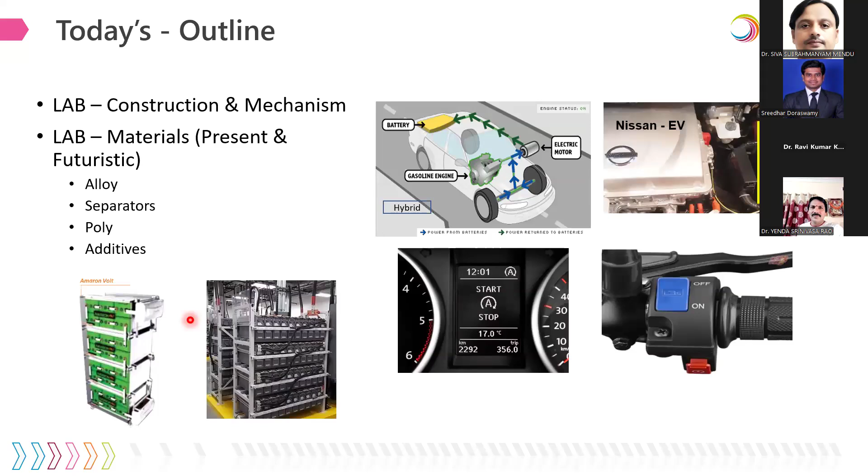So this is about the topics which we are going to look upon. Giving you the basics about the electrochemical series - these are different metals which like to gain electrons or lose electrons. Lead is there, which likes to gain more electrons and convert it to lead dioxide or lead sulfate.

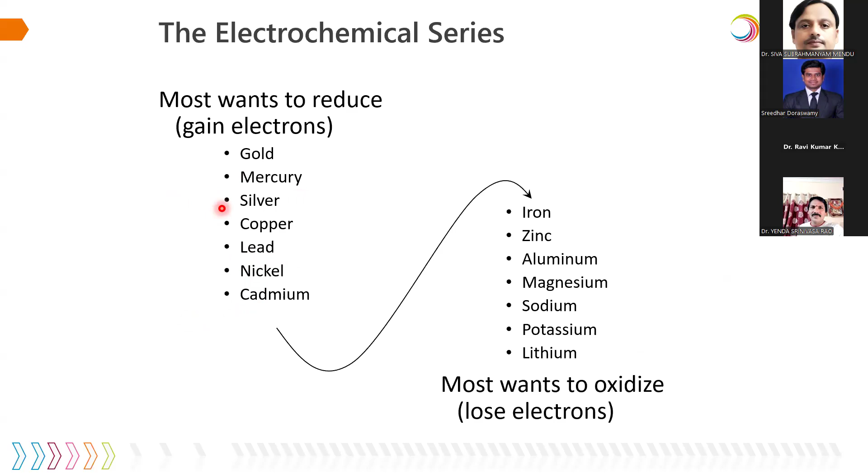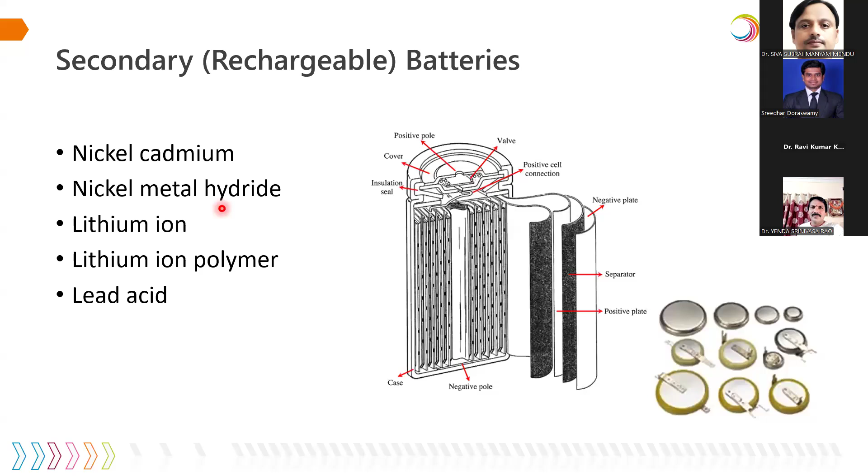Basically there are 2 types of batteries, primary and secondary. Primary batteries are just disposable batteries, and secondary batteries are rechargeable batteries. A few examples of primary batteries: zinc carbon, which we normally use like AA, AAA batteries in our homes - Leclanche is one scientist who came up with the zinc-based disposable batteries. And secondary batteries, here are a few examples: nickel cadmium, nickel metal hydride, lithium and lithium polymer, lead acid.

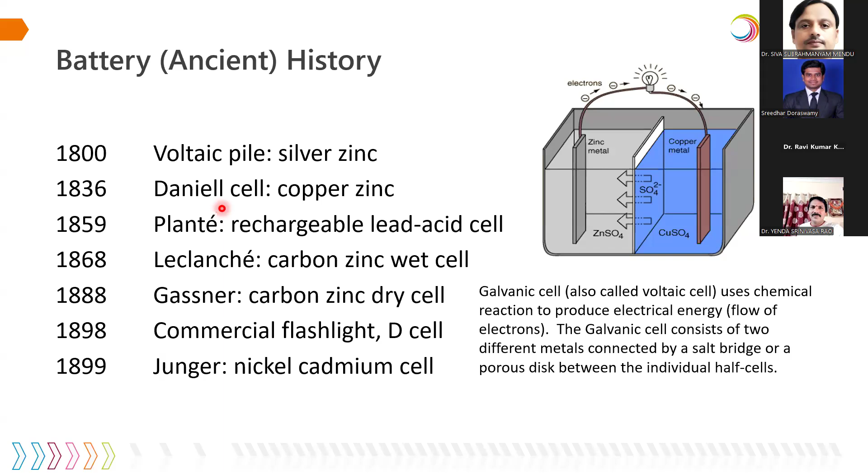If you see the history of the battery, in the 1800s it started with the voltaic pile having silver and zinc as current collectors of the metal rods, where the electrolyte solution is zinc sulfate and copper sulfate. Then Daniel cell, copper zinc, Plante - that's the first lead acid battery, demonstrated publicly to gain public interest in 1859. Leclanche in 1868, 1888 Gassner, and commercial Junger batteries in 98 and 99 of the 1800s.

And the latest is lithium ion. Everyone, even we, are also keenly working on developing these batteries into commercialization.

Coming to the construction of lead acid batteries, basically we have a grid. This is made up of a metal, looks like a mesh, and also a positive grid, this is also made out of a metal, it's also like a mesh. Then an active material is pasted in these voids of the grids.

Then a separator is wrapped, either positive wrapping or negative wrapping can be done, and then stacked into a bunch of positive and negative electrodes, connected to the negative terminals, and then it is sealed in a plastic container. This is our basic construction of a lead acid battery. And of course, the acid used is sulfuric acid, which is filled.

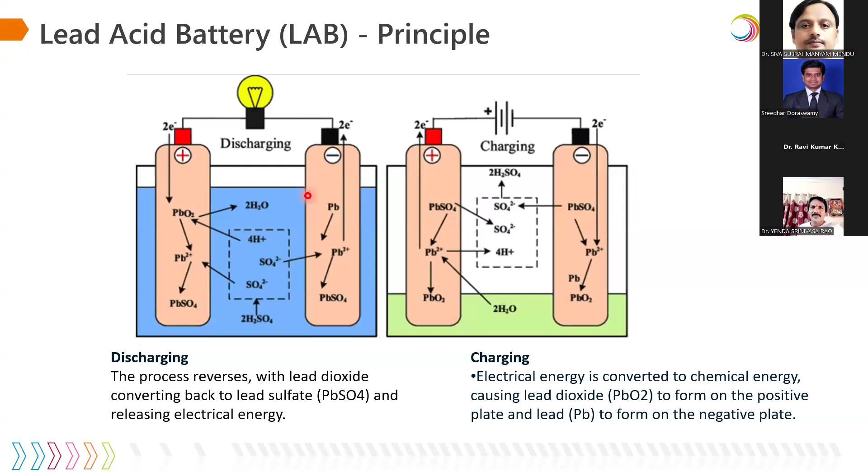So this is the basic mechanism of a lead acid battery. While it discharges at the positive, at the anode, both the anode and cathode are applied with the same type of material, called lead oxide or lead suboxide. When made into paste, it turns into lead oxide and 3BS, tribasic lead sulfate crystals. At the positive, the lead oxide remains the same, and partially when it interacts with the sulfuric acid, it converts into tribasic lead sulfate. So this is the generic process that happens at the curing level.

At the formation, as we say it's an electrochemical storage, we charge this, that's nothing but formation, so we get into 100% state of charge of the battery. At the anode, the lead suboxide and the 3BS converts into metallic lead and leaves out hydrogen sulfate. Similarly at the cathode, the suboxide converts into lead dioxide. If we see, the densities are varied here: the metallic lead density is 11.34 grams per centimeter cube, lead suboxide or lead oxide is 9.53, lead dioxide is 9.38, and lead sulfate is 6.29. Here we can see the densities vary at different levels, from pasting to formation and again charge and discharge conditions. This means phase transformations happen at each and every cycle in the electrodes.

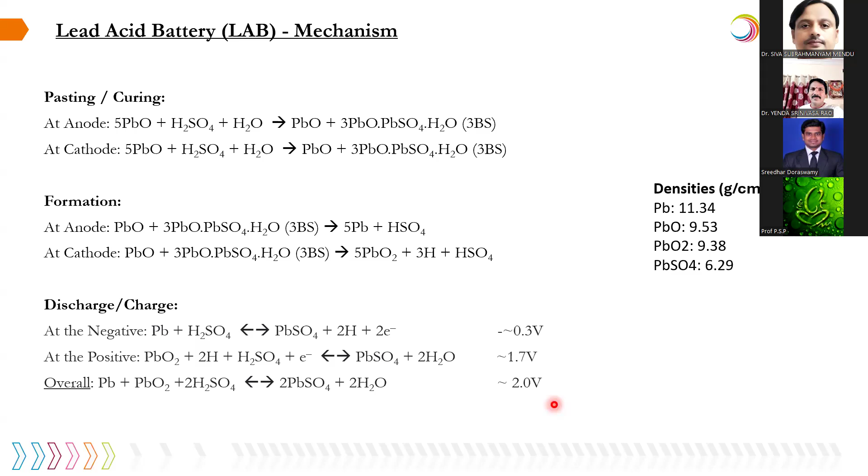And then later, the idle start-stop condition. This idle start-stop condition is a type of application where your vehicle will be halted at traffic signals, and then the battery gives the energy again to start the engine of the vehicle. But in the meantime, all your electrical equipment like AC, music system, power steering, power windows, lights, etc., should be working in that idle condition. So at that time, the battery will be delivering the energy. That is called idle start-stop condition, where you save fuel at traffic signals.

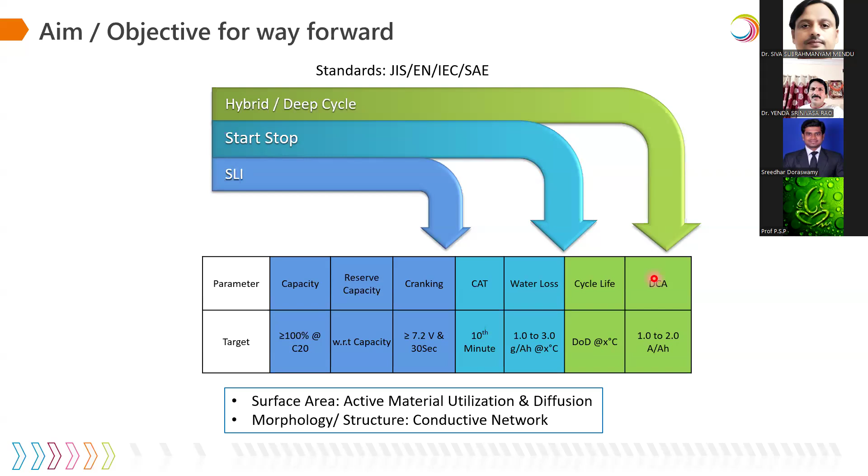Coming to hybrid and deep cycle - deep cycle also talks about EV requirements. Deep cycle means it may be either 80% discharge or even 100% discharge, that's a deep cycle. And the dynamic charge acceptance, as I was saying earlier, regenerative braking, where the battery needs to be charged even more aggressively. So as these evolutions are happening, the requirements are demanding the batteries to perform under very stressful conditions. So the surface area and the morphological structure of the electrodes are very critical elements.

Now there is a new requirement coming. It's called auxiliary batteries, especially designed for plug-in hybrid and electric vehicles. So what is an auxiliary battery? As I gave you an example in an earlier slide, the Nissan EV, where a secondary battery is placed for powering the primary battery and also establishing the safety features of the vehicle. Safety features means emergency door openings, alarms, alerts, SOS, and even nowadays the vehicles are connected to cloud, the communication system, all these things.

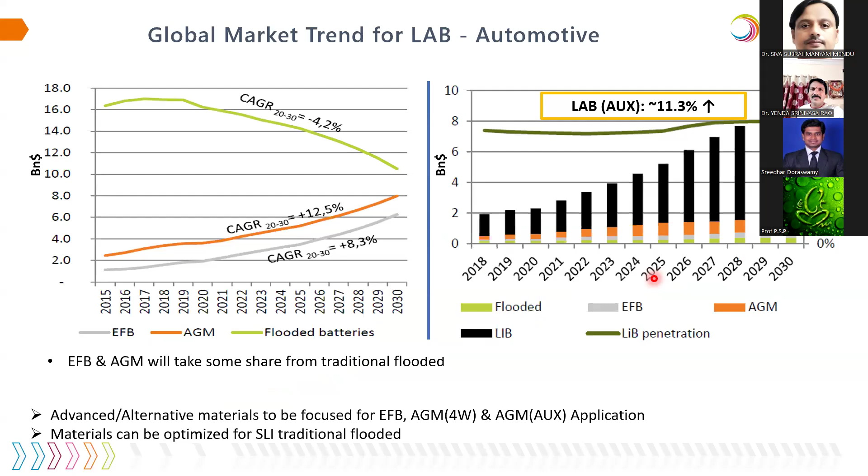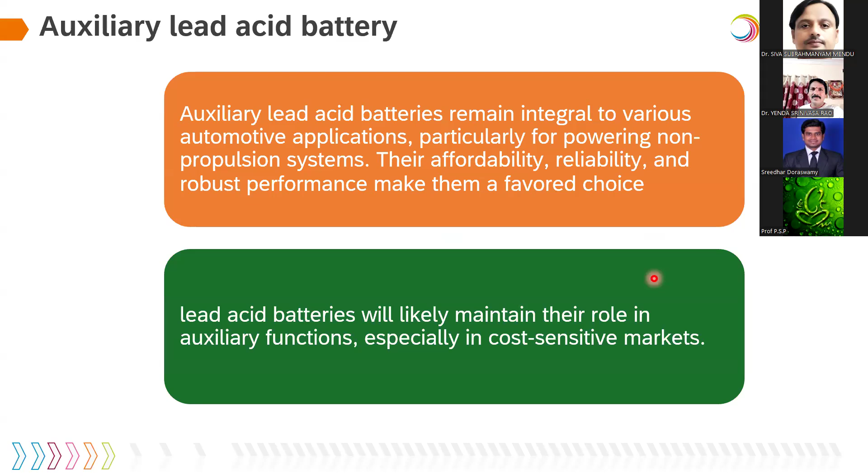So I'm saying why lead acid battery as an auxiliary source, because it's affordable, reliable, and has robust performance, and its role will be much better, most promising in cost sensitive markets.

This is a survey which was taken place just 6 months before with around 28 automotive companies across the globe, on the requirement for a 12-volt battery, either for battery electric vehicle, that is BEV, or plug-in hybrid vehicles. So those 28 companies gave their view upon the 12-volt battery requirement. 14 companies laid out that essentials need to be there: the 12-volt system should perform like key off, quiescent loads, wake up, after run, key off loads, parking lights, and voltage stabilization for the high voltage system. Those are the requirements posed by those 14 companies.

And 12 companies just made sure that the battery can support the required energy or not. That's all.

So with this survey, the International Electrotechnical Commission, which defines standard protocols for energy storage applications, for 12-volt, of course this standard 60095-8 is in draft condition. Probably by March 2025, this may get frozen and finalized.

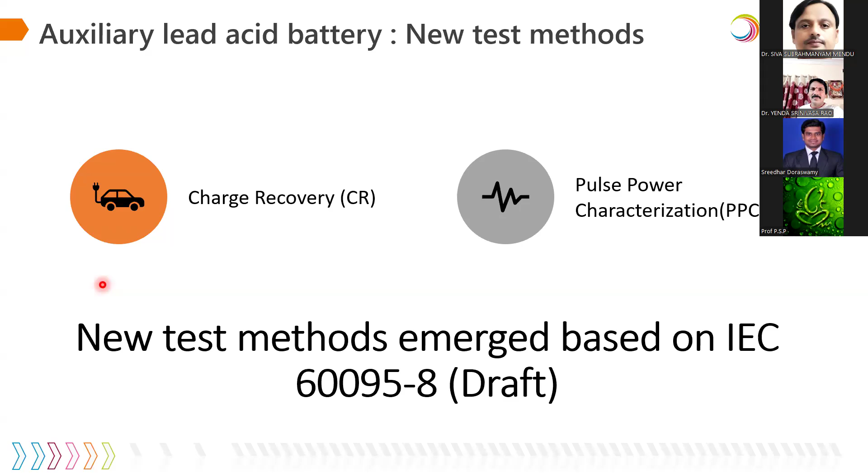So we will see what is this charge recovery, the 9th step, and the 10th one, pulse power characterization. These are two new test methods forced by the IEC for 12-volt battery requirements. As of now, there was no standard till date in the whole world, so now IEC is coming with the standard. If any energy storage technology meets these requirements, then that can have the market.

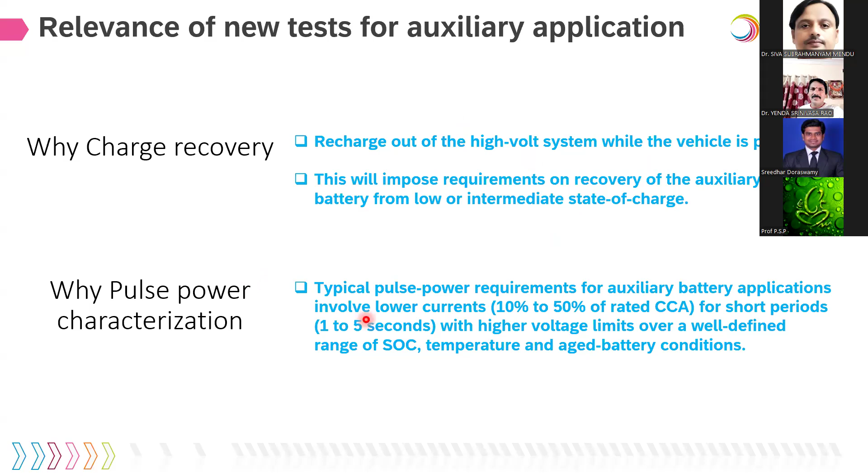So why charge recovery? As I said, the quick recharge needs to be there for the battery, even at parking condition - this is the requirement. And pulse power characterization is similar to the earlier cold cranking applications, but here with small current, but frequent time intervals. So these are the two things.

We dig deep about the charge recovery requirement. We see with 120 minutes, that means within 2 hours, the battery should reach more than 65% of SOC, that means 65% charging should happen. This is quite challenging even for lithium-ion related storage systems, where minus 18 degrees centigrade is the temperature where these batteries need to be responsive. If at that temperature it is not responsive, then mostly the battery will not be selected as an ideal solution for electric or plug-in hybrid.

So coming to the pulse power characterization, here it is based upon the state of charge of the batteries - 100%, 50%, 80%. The 80% has not yet been determined. By March 2025, this may be frozen at 100% SOC at small current rate, like 0.2 amps.

It should be greater than 11.9 volts - the 12-volt system should be more than 11.9. And at 0.4 condition, it should be more than 11.3 volts. Similarly, at 50% SOC condition, it should be greater than 10.3 volts for 0.2, and for 0.4 current condition, it should be greater than 9.3. So these challenges are not that difficult - these are achievable.

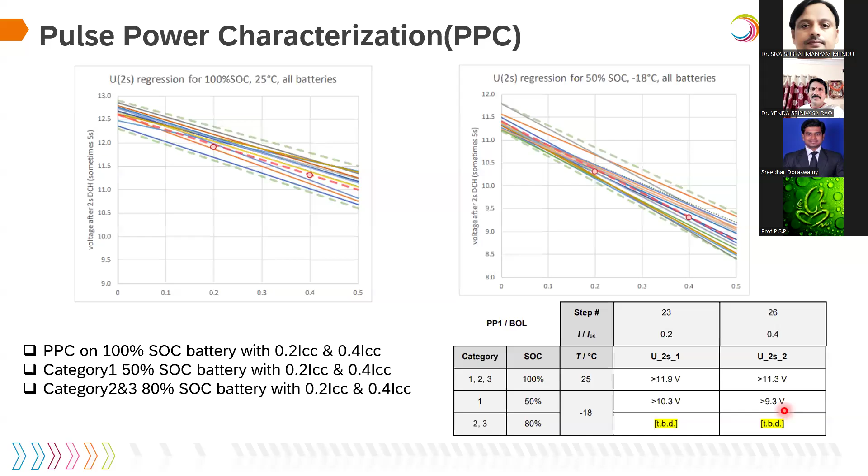So the charge recovery and pulse power characterization normally depend upon two parameters, called conductivity and DCA, dynamic charge acceptance, and cold cranking ability, CCA. The conductivity mostly depends - while seeing the test profile or requirements where the batteries are subjected - we have identified 4 segments in the positive: the grid thickness, that means current collector thickness, the type of alloy for the grid, and the active material density, and the conductive nature or conductive network inside that active material.

Whereas in pulse power characterization, the negative active material density, the expander optimization - the expander is a composition of 3 materials: one is barium sulfate, second is lignin, and third one is carbon. So we will see more advancements in those areas and surface area of those electrodes to meet these requirements, like charge recovery and PPC.

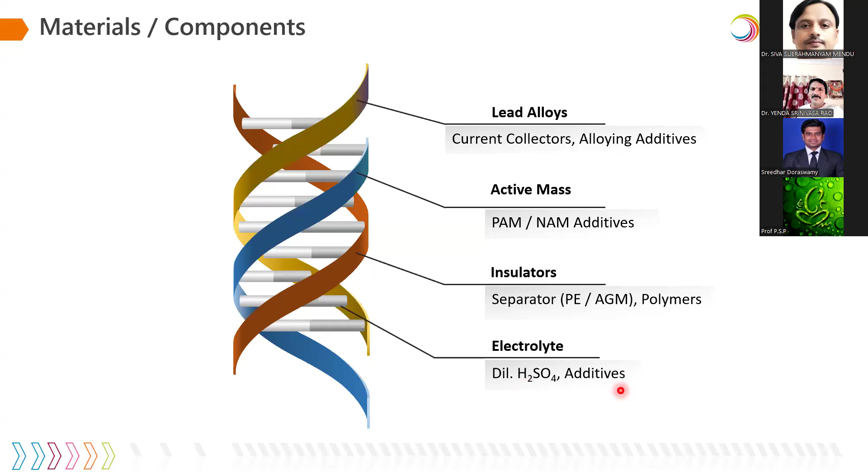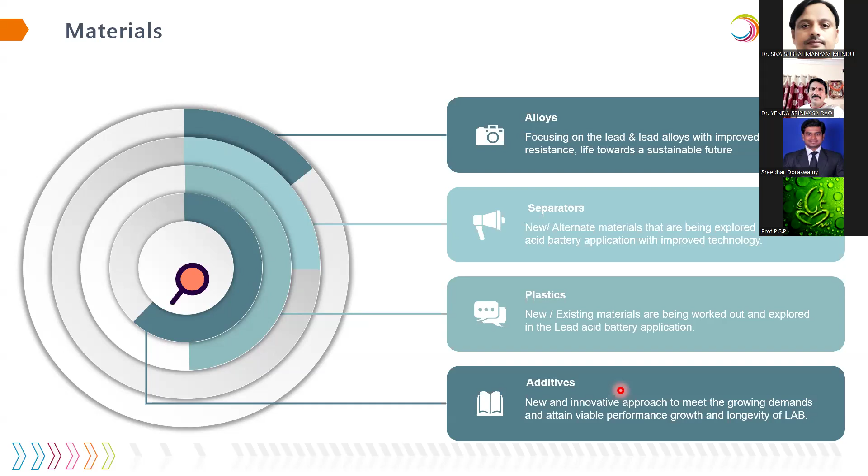So alloys mostly focus on corrosion resistance, like addressing premature losses. Separators with better porosity, better tortuosity are being explored. And plastics, yeah, flame retardant plastics are also being explored. And additives in all these above three areas, including the electrolyte, to improve the longevity.

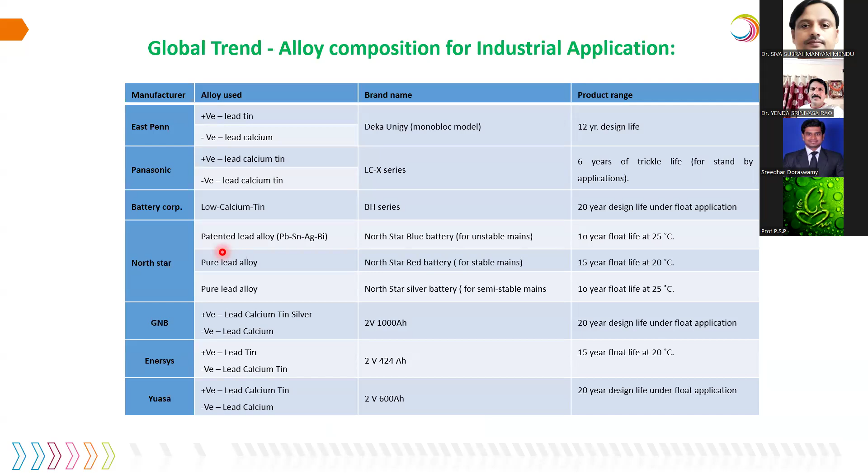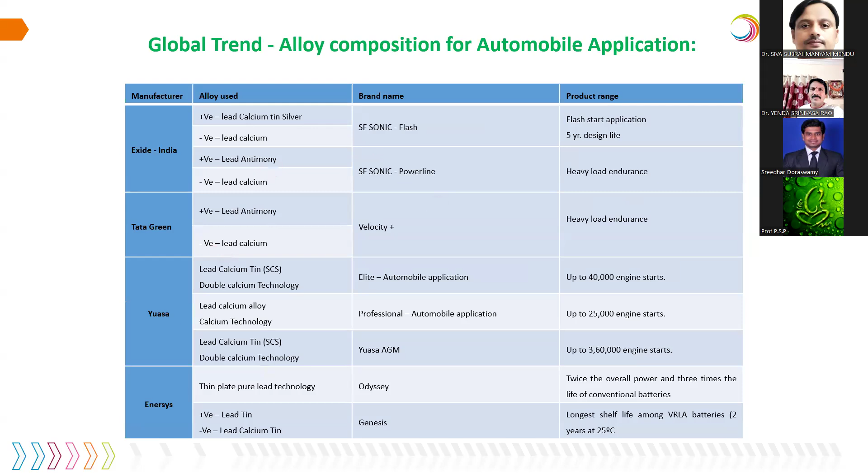These are the other technologies. So lead, as the primary material, like 99% lead has been used, and the other 1% is tin, calcium, antimony, silver, etc.

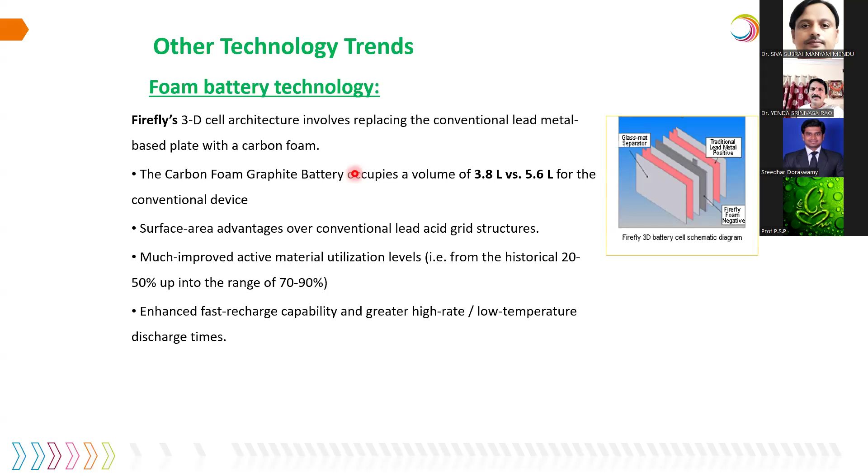So now, apart from lead, Firefly is one company which is working on pure graphite or carbon foam, as they term it. They have replaced the lead current collector with this foam, and they have immensely improved the active material utilization rates, and even achieved better recharging capabilities.

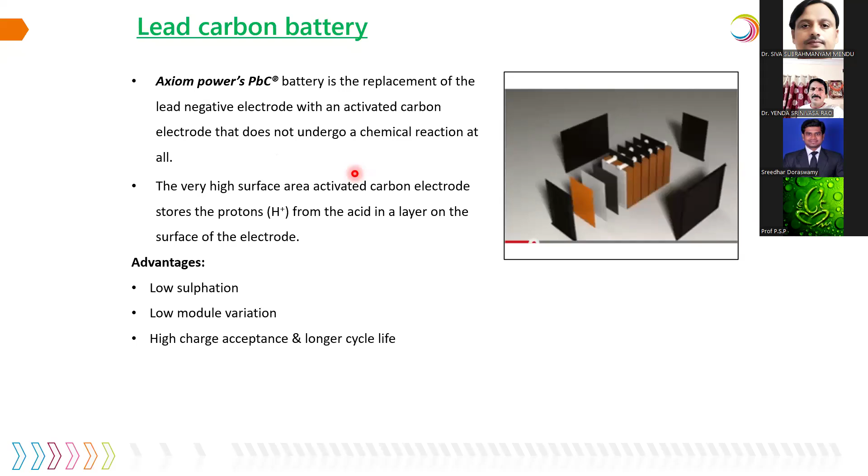Axiom Power is also a US based company; they have also replaced the lead grids with carbon. There is another company which is working on copper mesh coated with carbon and using it in their batteries.

So this is just a prototype; these type of batteries are not yet commercialized.

So the key takeaway from the alloy perspective is that most of the leading manufacturers are using lead calcium tin and lead antimony in different applications. But what are the characterization techniques involved here?

So the characterization techniques here, as I was saying about the corrosion, we do corrosion testing. There are three types of corrosion testing: one is the gravimetric method, the second is Tafel extrapolation, and the third is accelerated potential techniques.

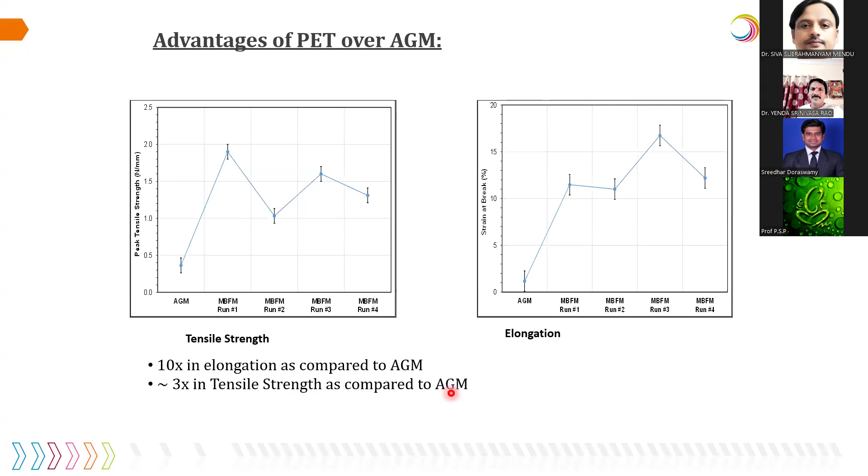When we compare the properties, normal AGM is 10 times lower in the elongation, and 3 times lower in the tensile. So the composite AGM separators are taking the pace in this technology.

Coming to the polyethylene separators, the essential properties for a polyethylene separator should be low acid solubility, good oxidation resistance, low electrical resistance, low acid displacement, mechanical strength, wettability, and impurities. Impurities should be low. Normally in lead acid application, we talk the impurity should be at the ppm level.

Worldwide usage, we see 85% people are using the PE separator, and 15% other kinds of separators. There are also some disadvantages with the polyethylene separator: the high cost, low compressible forces, and the high internal resistance. Whereas in AGM, internal resistance is a little bit low, and that's why we may experience a few short circuits, but here, due to high internal resistance...

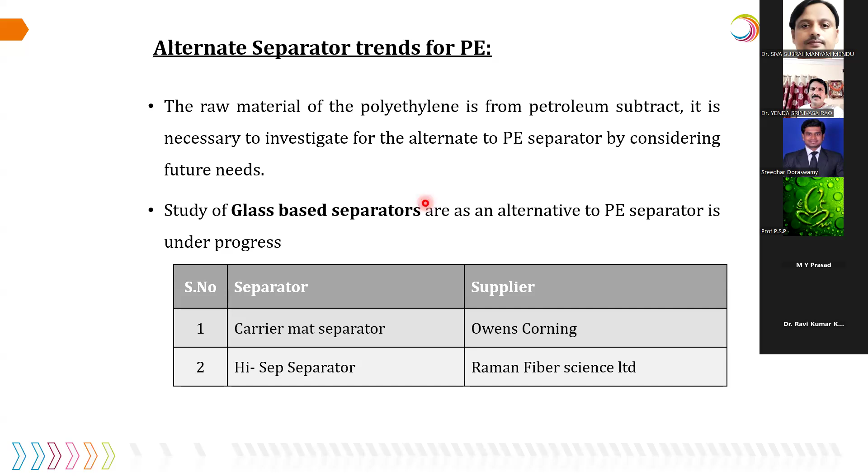Players in global space, the Owens Corning and Raman Fiber Science Limited, are exploring the alternate separators.

The key takeaways from the separator point of view: reducing the water loss or the stratification behavior, a horizontal rib profile in the polyethylene separator has been explored, and is in the developing stage. Right now it is a vertical profile. And in AGM, the polyester or polyethylene terephthalate based composite AGM separators are coming into place.

Coming to the characterization techniques, these also involve the mechanical properties like tensile, puncture, and surface area characterizations to see the pore size distributions in the separators. So all the properties we do, and also the electrochemical property, which is the ionic conductivity or the ionic resistance of the separators we see.

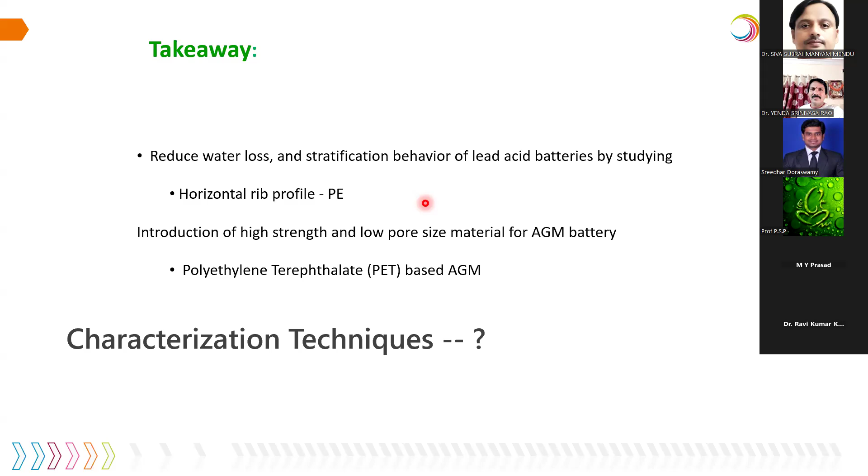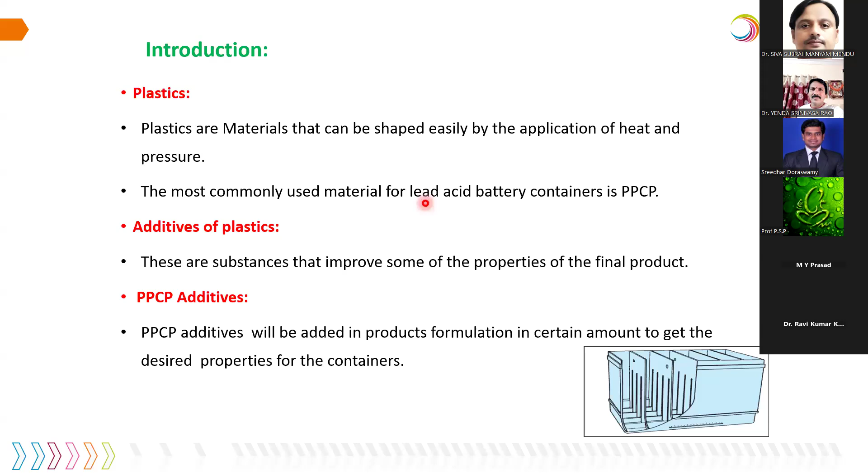Coming to the plastic segment, everyone is aware about the plastics. The plastic we use is PPCP, the polypropylene copolymer. Worldwide, that's the plastic everyone is using.

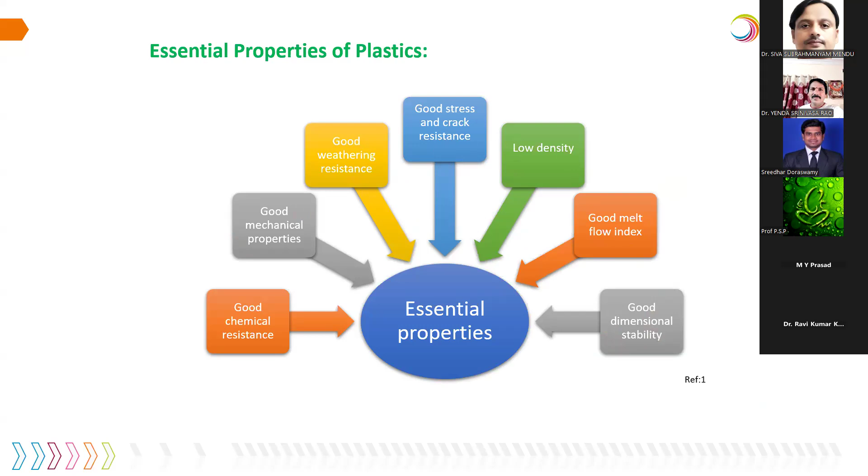The key parameters or key properties required for the plastics are good chemical resistance, good mechanical properties, weather resistance, crack resistance, low density, good melt flow index, and good dimensional stability. These are the requirements for the plastics.

People are also trying to have additives, similarly like in grid alloys or in the separators. In plastics also, some additives are doped to have better flame retardant behavior or improve the mechanical properties of the plastics.

Based on the function of the additive, property modifiers, stabilizers, processing aids, and property extenders are the selections we normally do. Based on the properties of the additives, flame retardants, impact modifiers, UV stabilizers, and chemical resistance materials are being explored.

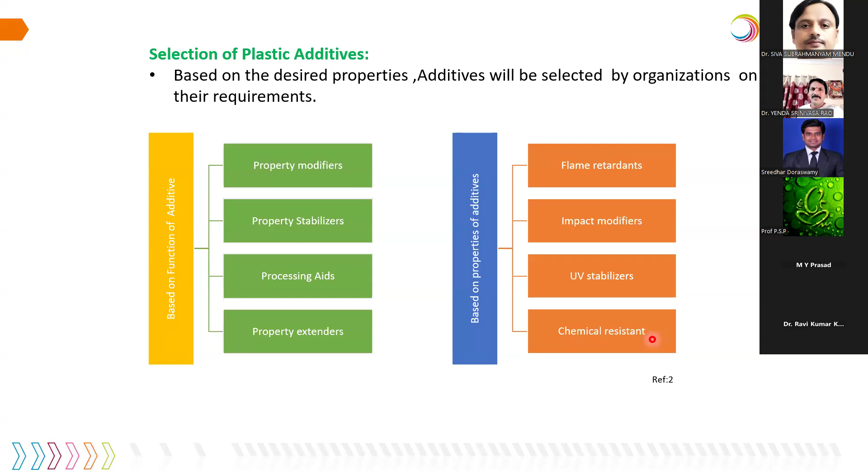When we categorize the plastics, there are 6 types of plastics: polypropylene and styrene based, and polyvinyl PVC or polycarbonate. These other materials are not that suitable for the chemical or acid resistance. That's the reason we use polypropylene or PPC and ABS in our battery manufacturing process.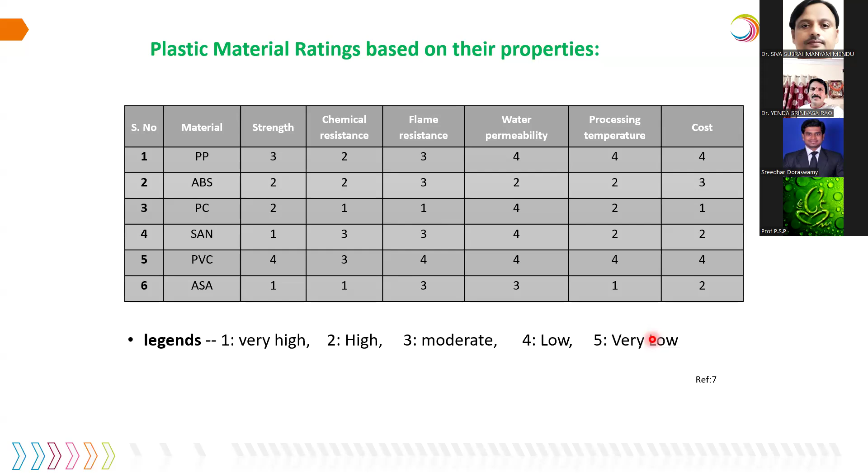A few additives are being explored. Here I have listed some of them. The calcium based additives, especially, people are highly recommending due to the plasticity and the manufacturing benefits.

Worldwide we see PP with additives are being explored, and then ABS with additives being sought by lead acid battery manufacturers across the globe.

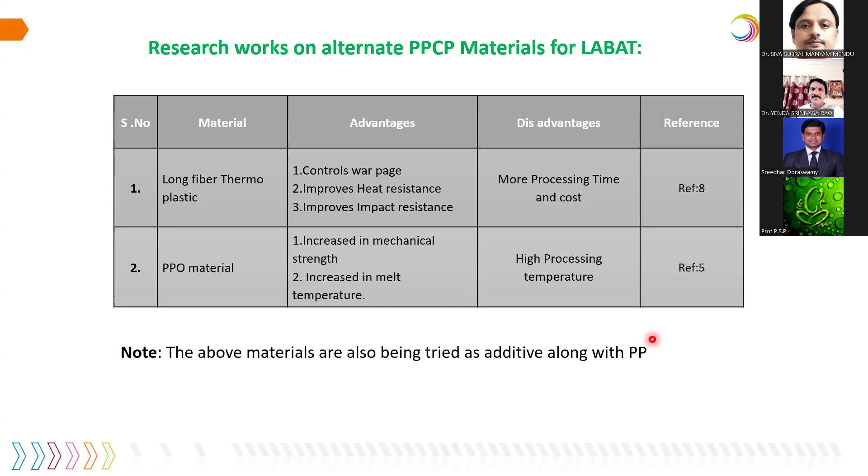The long fiber thermoplastics and the PPO material, the phosphorus based one, these are the two materials actively sought out for polypropylene due to its compatibility with polypropylene and also the cost of the material.

Coming to the characterization techniques involved here, we do mechanical properties like flexural, Izod tests on this material, flammability with respect to UL 94 standard we follow, and DSC, TGA thermal related stability analysis we do for different types of formulations and different types of plastics.

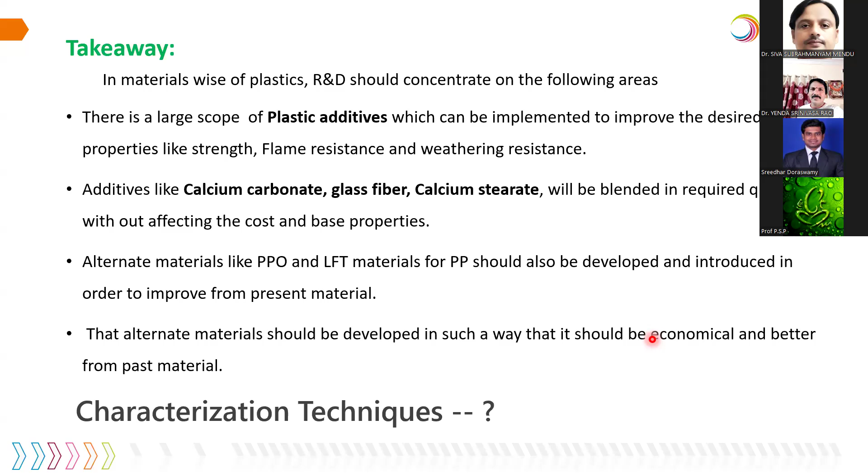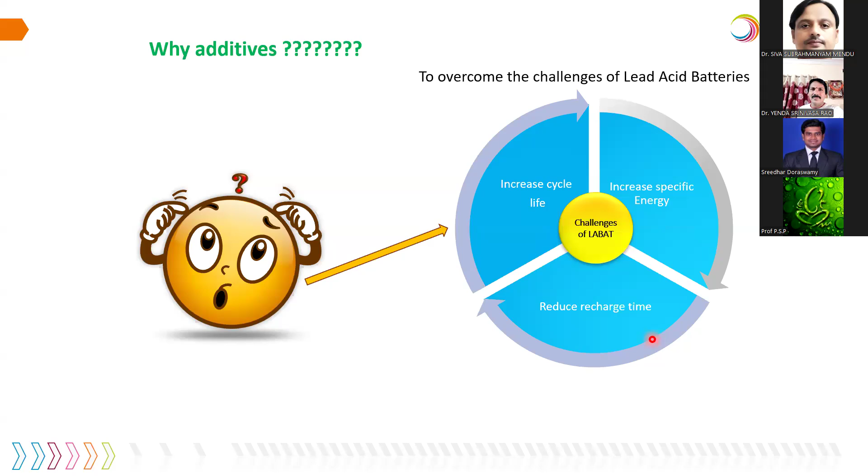Now coming to additives' role, these additives are primarily focused upon the active material additives. As we know, the active material here is lead oxide, and to improve the utilization rate of those active materials, that means increasing the span of the activeness of that material, we require some additives.

Normally these additives are 2% by weight, used either in positive or negative at maximum, and the impurity should be less than 0.1%.

If you see here, I have given the electrode preparation process, that is the preparation of the PAM, the positive active material, where lead oxide is added with the binder. This is reacted with sulfuric acid, and the additive used here is SPTH, that is sodium perborate tetrahydrate, and for some applications 4BS, that is tetrabasic sulfate crystals, is used as an additive in the PAM, the positive active material.

Whereas in the NAM, lead oxide, binder, and sulfuric acid are there, but the expander is one critical ingredient used. This expander consists of three elements: barium sulfate, lignin, and carbon. These materials are added into the pasting mixer along with the lead oxide powder, where the lead grids or panels are included, are indented, and the pasting happens, and then it goes into the flash dryer and the curing chamber, where the conversion happens from lead oxide to tribasic or tetrabasic structures, and then positive flat plates and negative flat plates are made.

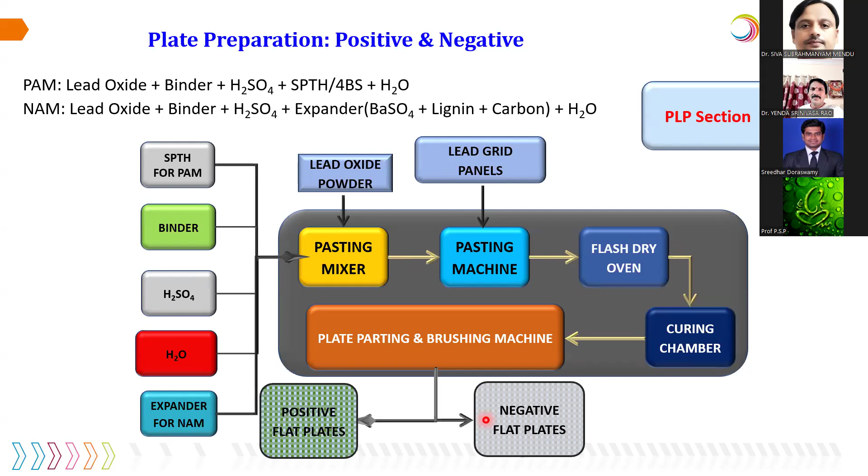We'll just see the oxide preparation process here.

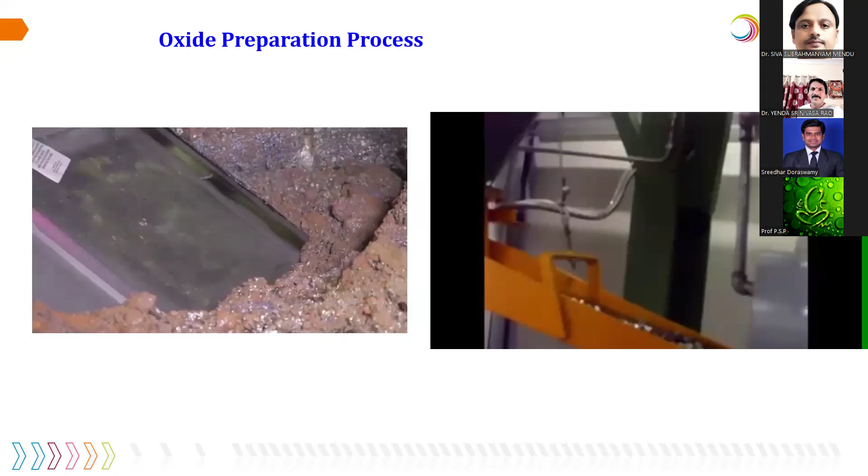This is the Barton pot oxide preparation technique, where the lead ingot has been melted. This is the dross or the slag. The melted metal reacts with the oxygen and then forms a powder.

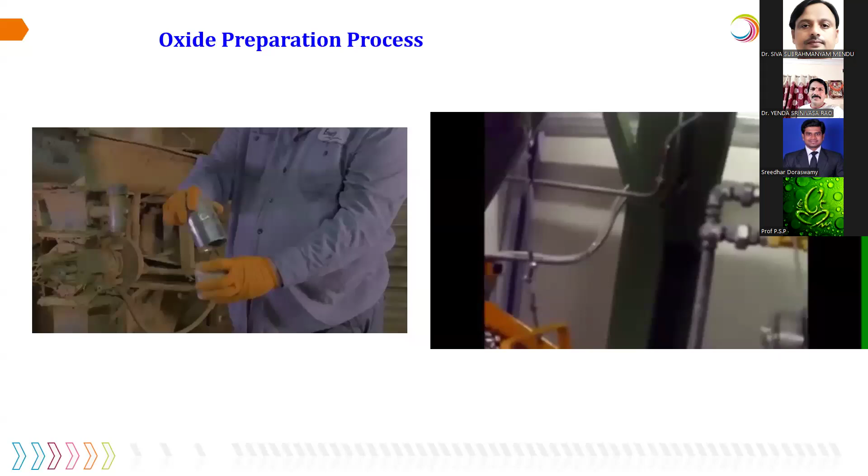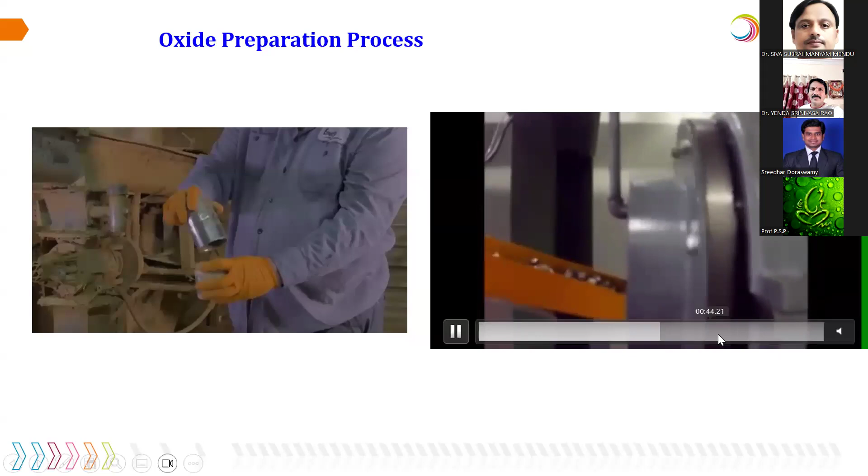So this is the right side one, the ball mill process. The left one was the Barton pot. This is the ball mill, where the lead ingots are made into small balls and then rotated at the desirable speed, where this lead metal converts into lead oxide powder. So this is the horizontal or conventional ball mill equipment. This is how the active material or the lead oxide powder is made.

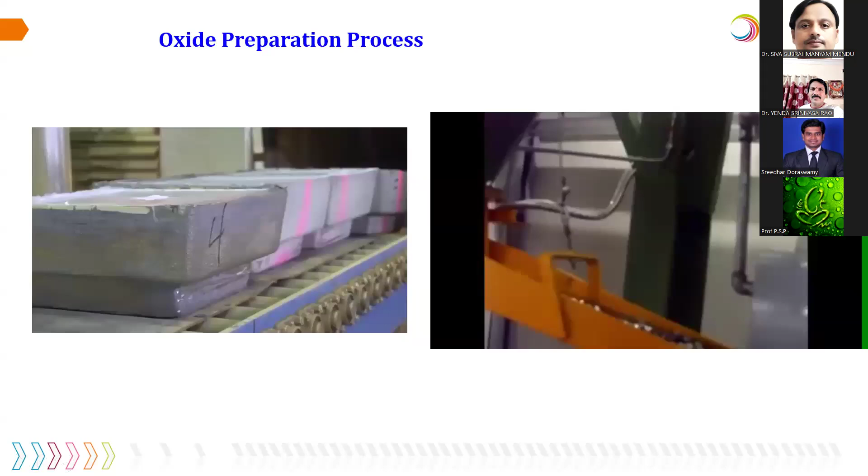Now we see the comparison between the two techniques, how the lead oxide powder is made by the ball mill method and the Barton method. I hope my cursor is visible, or should I use the pointer?

You can see here, so we have both processes, and mostly in the whole world these two processes are used with respect to the application. For stationary applications, the Barton pot method is used, and for automotive and quick charging, quick discharge applications, we use the ball mill technique.

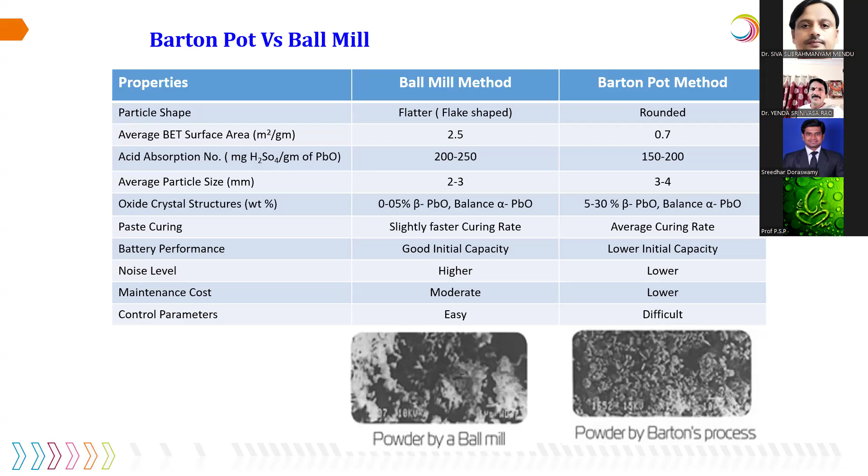So here is the paste mixing process of the active material preparation, where the lead oxide powder is mixed with either 3BS or the 4BS crystals, that is the tetrabasic sulfate crystals, in the PAM. In the NAM, the carbon and lignin are mixed up here.

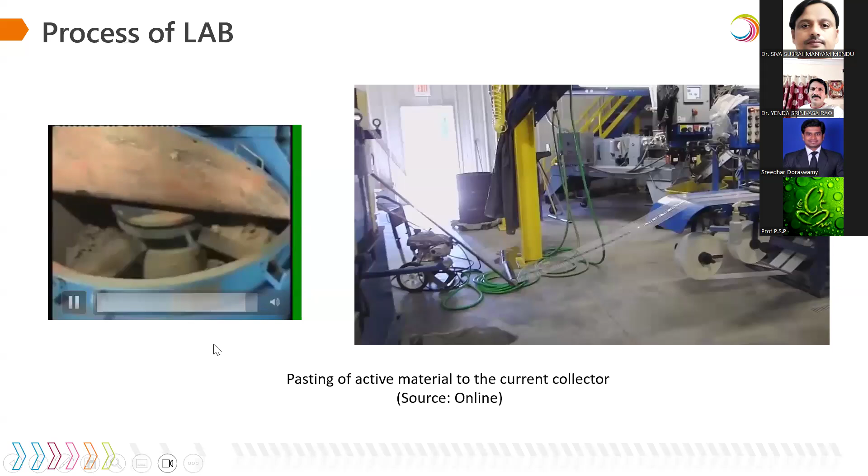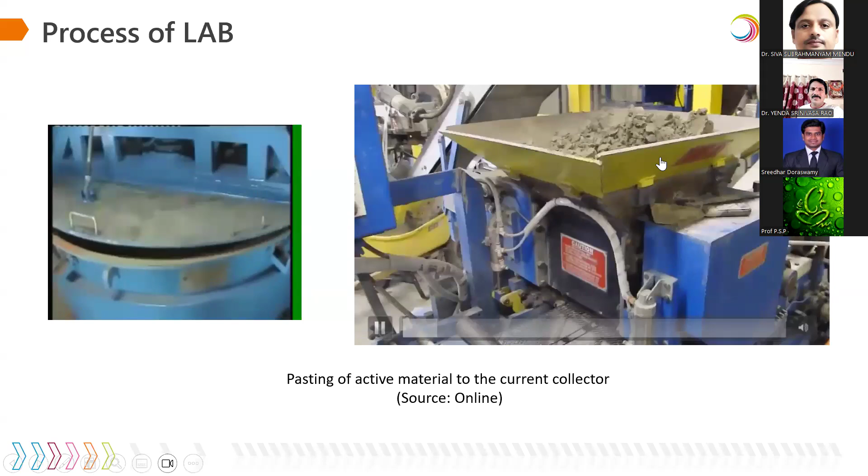And here is the pasting process, where the mesh type grids are applied with the paste, which is the active material. Then it goes into the flash dryer, at a temperature around 180 degrees centigrade to remove the moisture and other contents in the plate. These are the flash dryers.

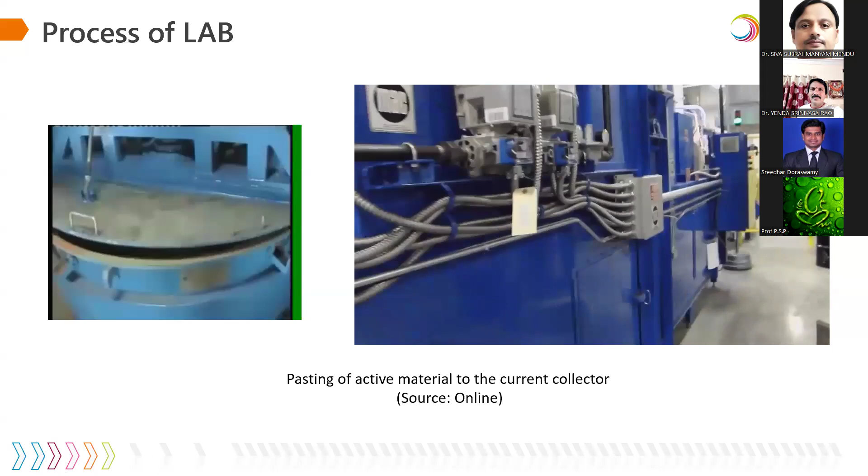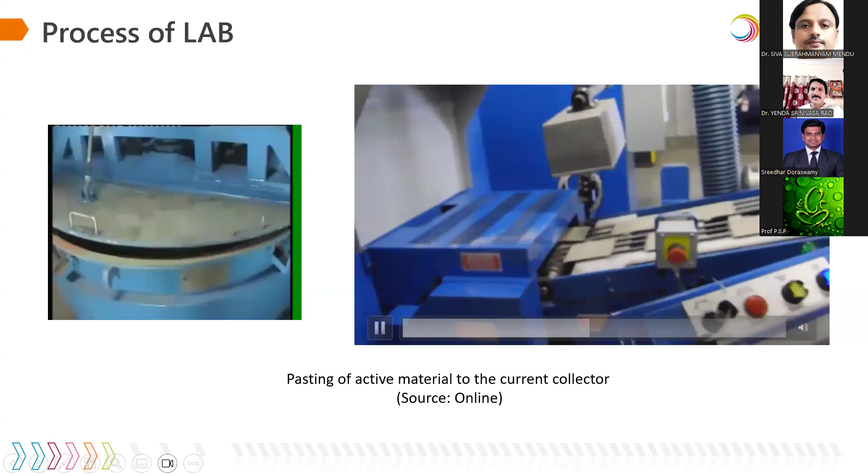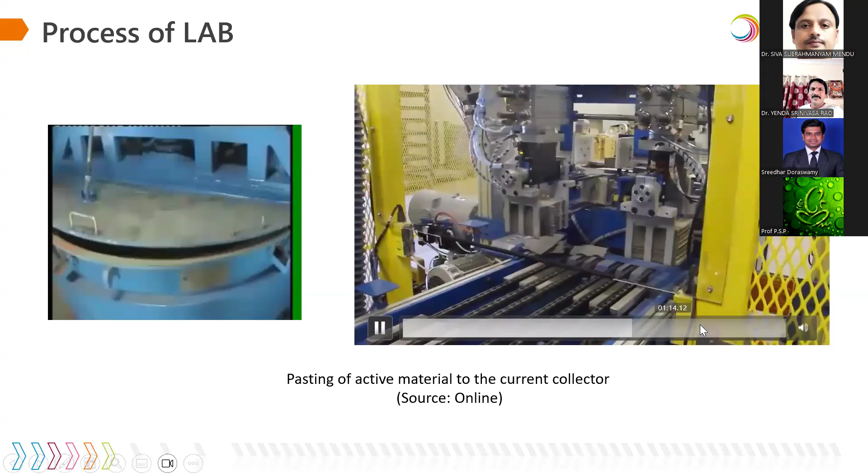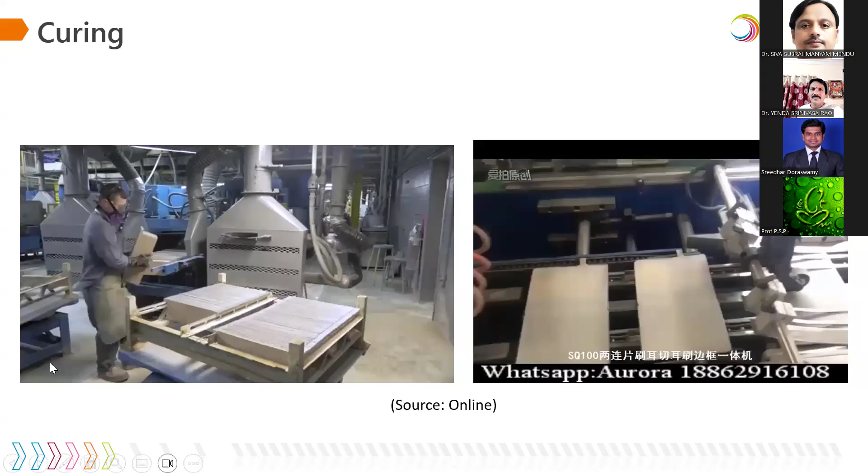And the plates are being collected by the robotic arm. Just forward it, these are the electrodes. After the pasting, it goes for curing. This is the big electrode. These electrodes are used for telecom applications, railways, and industrial applications.

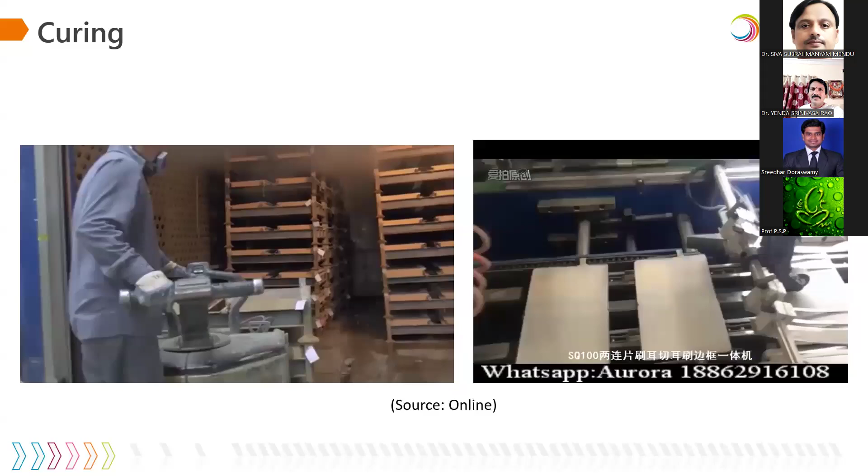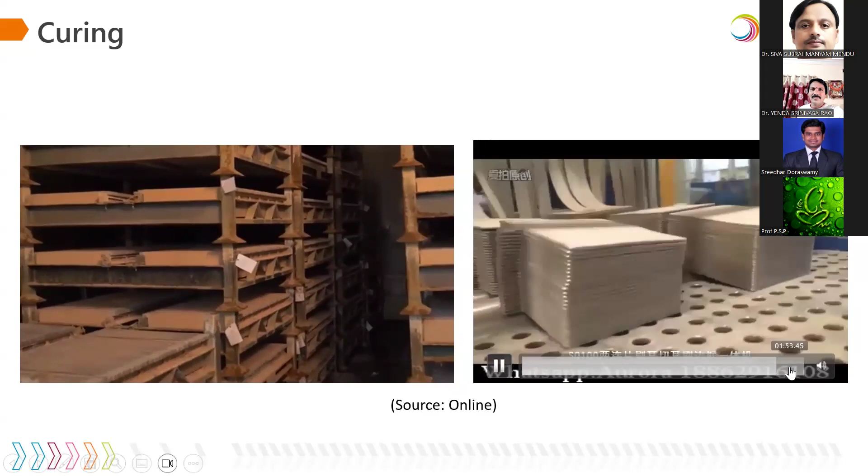So there are different types of additives: positive additives, negative additives, and electrolyte additives. I'll directly jump into what additives we use, even globally what people are using. This is called the seed crystal, nothing but 4BS crystal. People sometimes term it tetrabasic sulfate crystals, used for cranking applications.

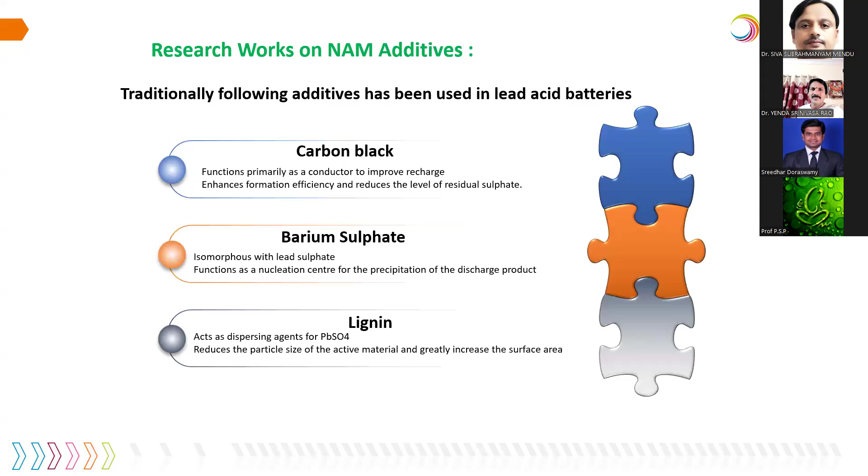Titanium oxide, tin oxide, other metal oxides, and red lead have been used. Sodium salts, CMC, silica, and graphite have been used in the PAM additives for improving the porosity. In the NAM additives, we use carbon black, barium sulfate, and lignin materials.

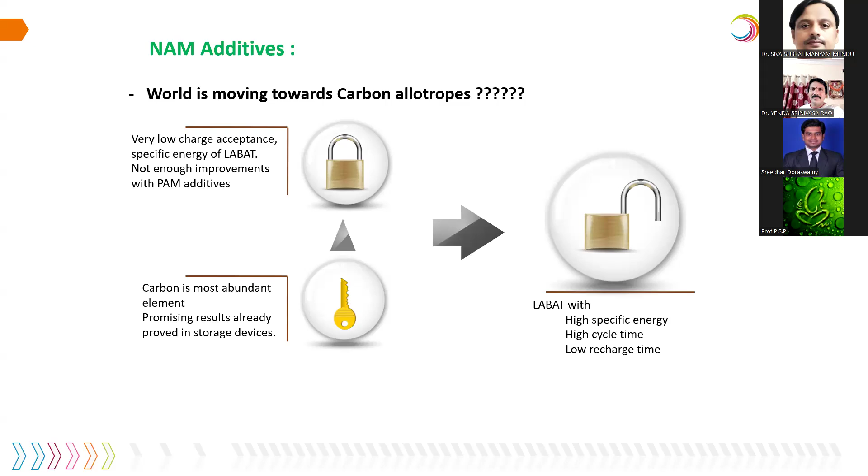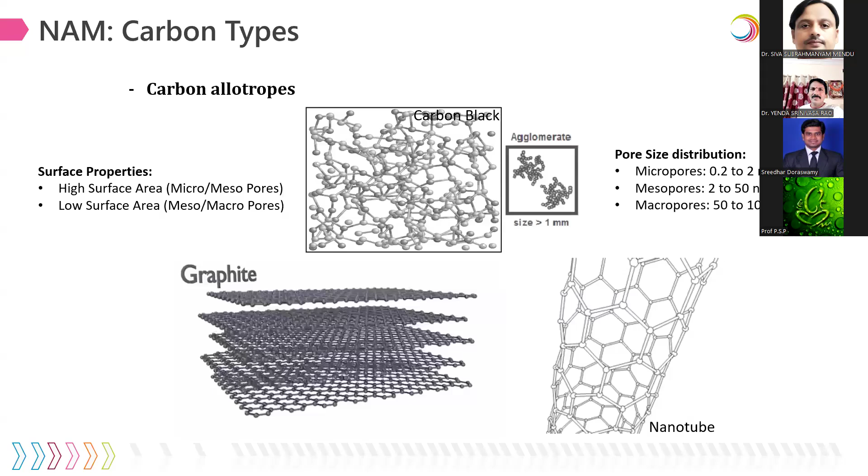Coming to carbon, carbon has a big wide group, so the allotropes... coming to the carbon allotropes, I can classify this into basically two things based on surface properties, like high surface area or low surface area, and also another point with respect to pore size distribution: micropores, mesoporous, or macroporous. So we are using graphite type materials, nanotubes, and graphene is under exploration. A few competitors and active researchers are working on activated carbon blacks, graphite, graphene, nanotubes, etc.

So if you plot this with respect to surface area and conductivity, lower surface area will have lower conductivity, and higher surface area will have higher conductivity. This is not always true, okay, this is too generalized, okay.

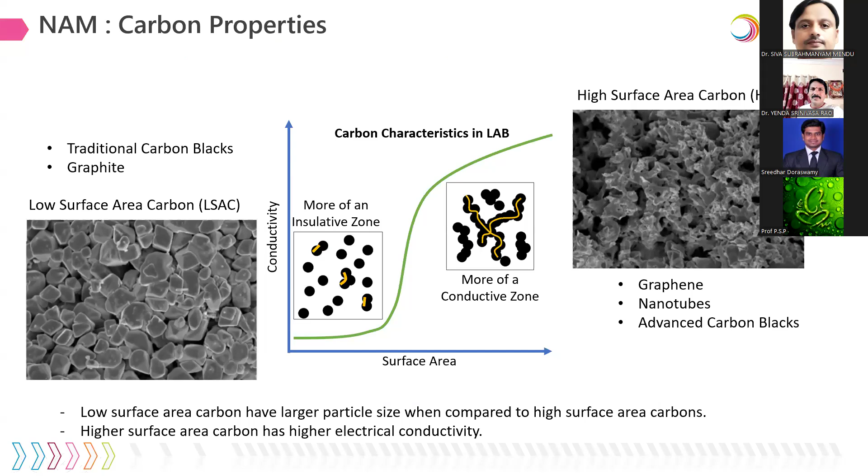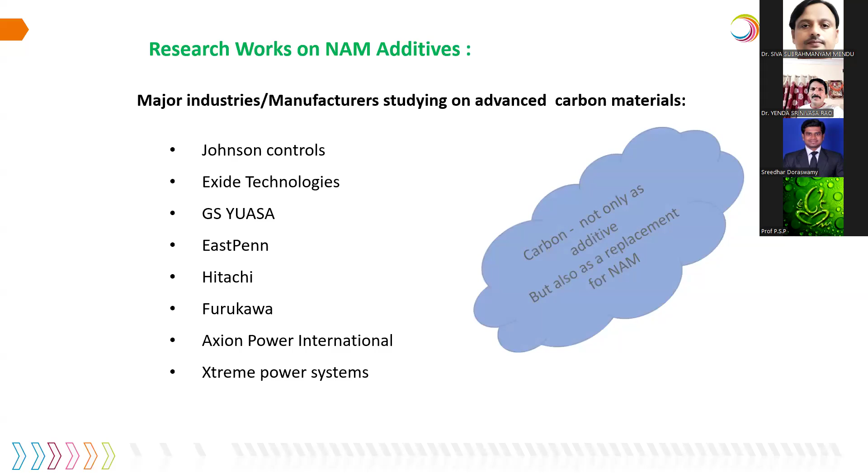People across the globe working on carbon materials are listed here. Already people are using nanotubes in electrode processing. Earlier we have seen Axion batteries making carbon-based grids, something like that.

Here is an ultra battery developed by Furukawa Japan, East Penn USA, and CSIRO laboratory in Australia. They have developed a hybrid electrode which performs as a capacitor and also a battery.

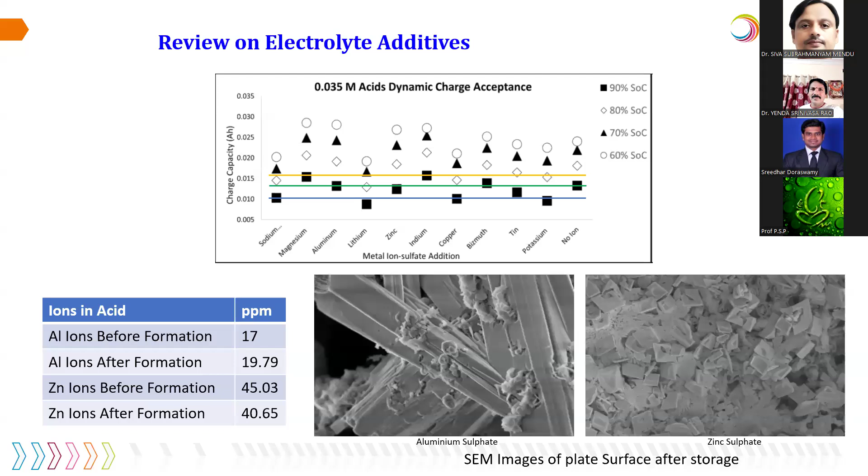We are also developing some supercapacitor electrodes for application. Coming to electrolyte additives, there are many like sodium-based, magnesium, aluminum, lithium, zinc, indium, copper, bismuth, and potassium, out of which magnesium, aluminum, and zinc are the three best performing materials.

The key takeaway is that advanced carbon is a highly sought out material across all energy storage technologies. Characterization techniques involved are XRD, XPS, microscopy and spectroscopy techniques, and also mechanical, thermal, and electrical properties. So I'll give a small recap of what we just looked into.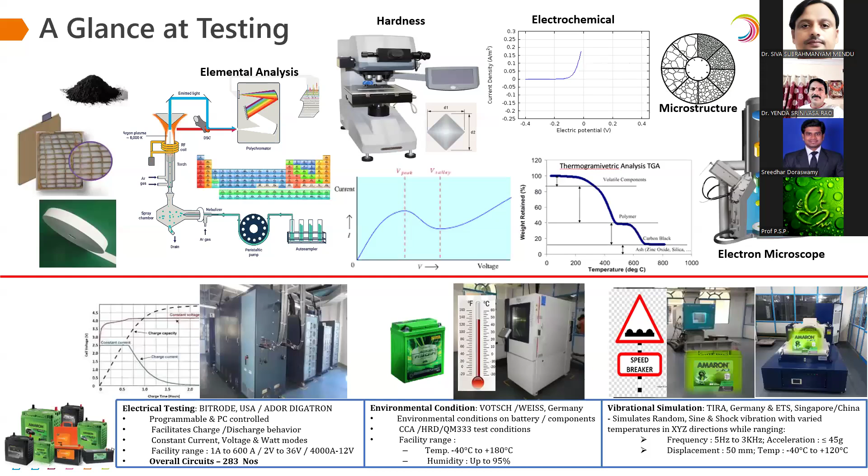We also adhere to environmental regulations, ROHS, REACH, CMRT, and conflict minerals. And these are the few national and international standards which we follow, ASTM, for materials, material testing, and product level testing.

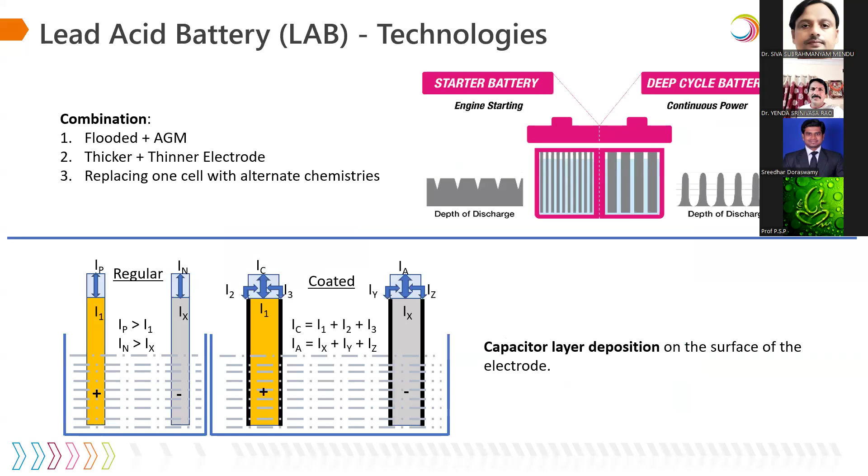Coming to the advanced material point of view, now as a device point of view, we are exploring having 2 types of chemistries in one combination. Another thing is the ultra capacitor layer deposited on the electrodes. This may be the next coming future for battery applications. We have a few national and international memberships.

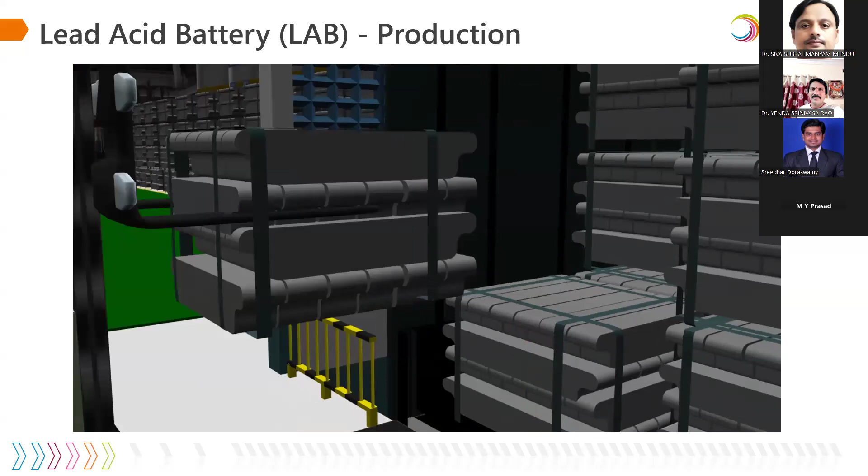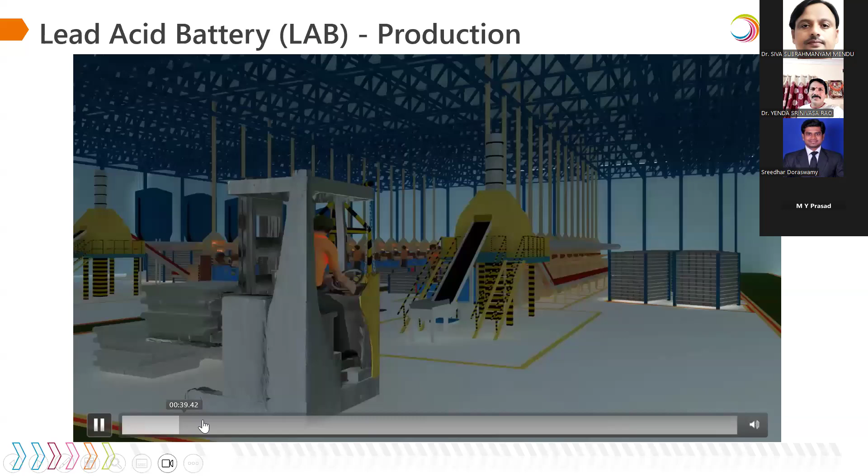Finally, I just want to show you this video and finish it off. Here the lead ingots or metallic lead come to the warehouse, and then these ingots are sent to the oxide manufacturing process. I'll just directly go to the oxide plant because of lack of time.

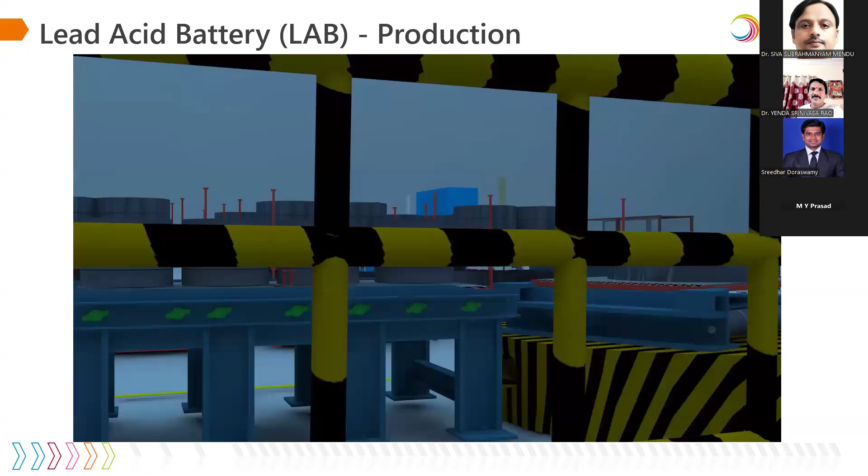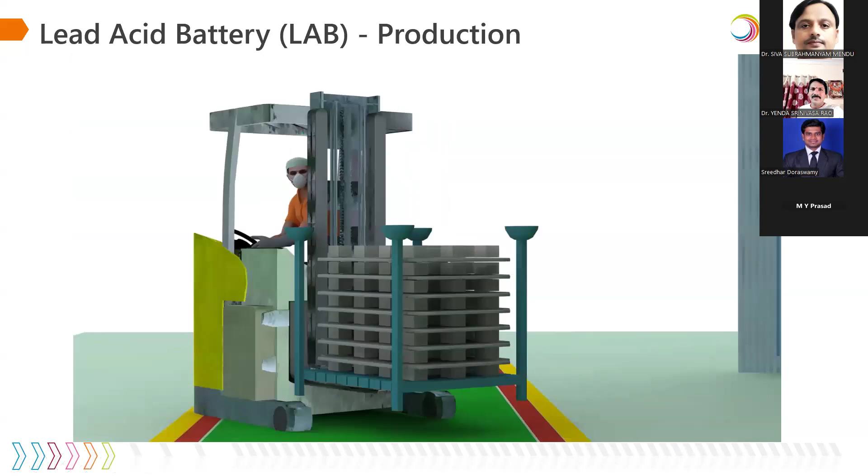This is a complete battery manufacturing facility in a short video. This is a ball mill oxide. The flash dryer, the paste, the active material is applied onto the current collectors.

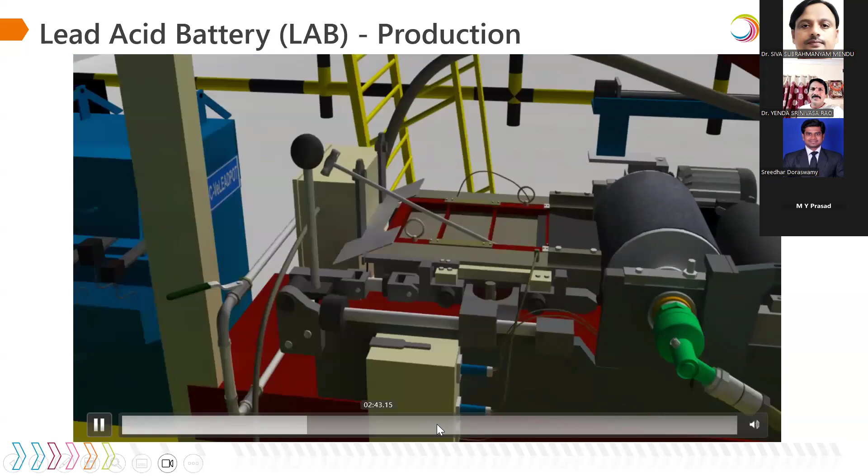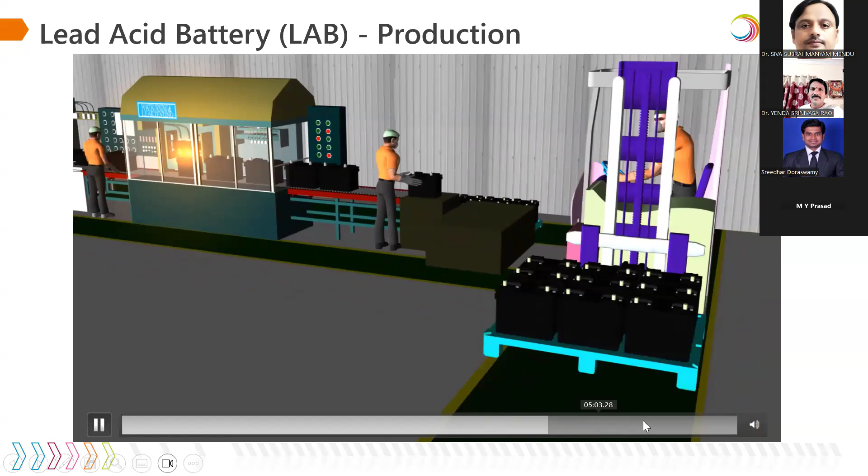These are manual, the old videos. Actually, now everything is automated. Acid filling and testing happen, then the formation. This is the dump and refill technology.

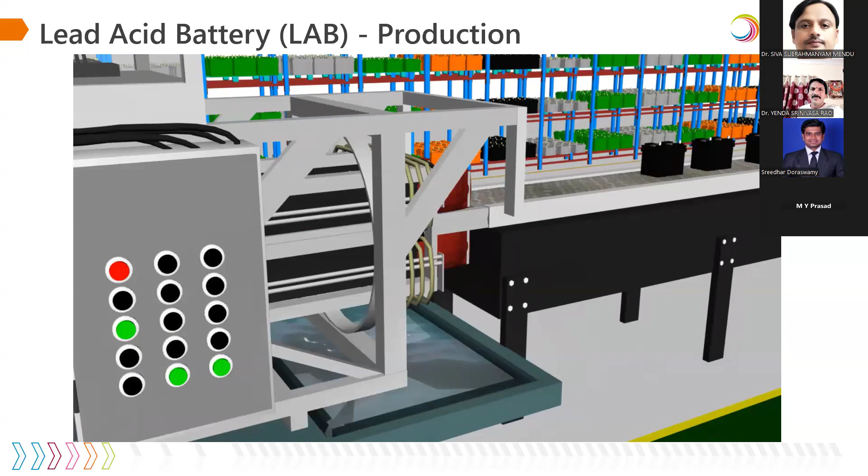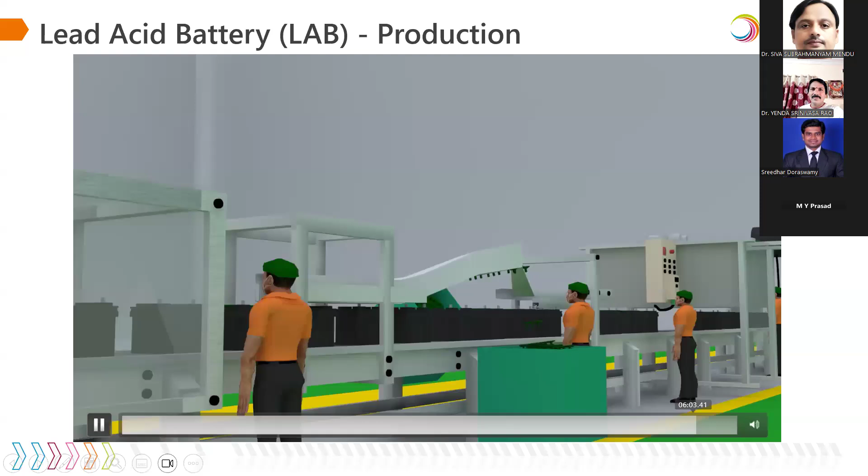After formation of the battery, the electrolyte is refilled with different specific gravity. This is the finishing part. The whole battery is tested and then sent for dispatch. The batteries are stretch wrapped.